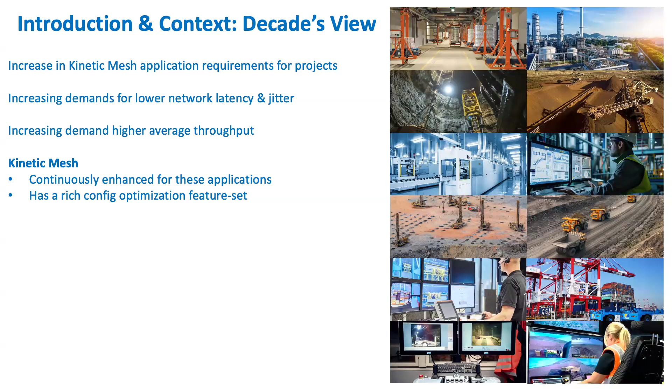Kinetic Mesh is continuously being enhanced for these applications. We continuously develop our rich config optimization feature set, and consistently develop new products and features to address these demands. However, one key takeaway today is for partners to understand their application's network performance requirements. This topic will come up repeatedly in today's session, and you'll see it covered in a lot of the training material as well.

It's not a good idea, and it's unfortunately very common today to see people approaching an opportunity or a new design or requirement and then simply selecting hardware when they don't really understand the application requirements. So we're focusing on some key network metrics and performance metrics you need to be aware of to understand the impact on product selection, network design, etc.

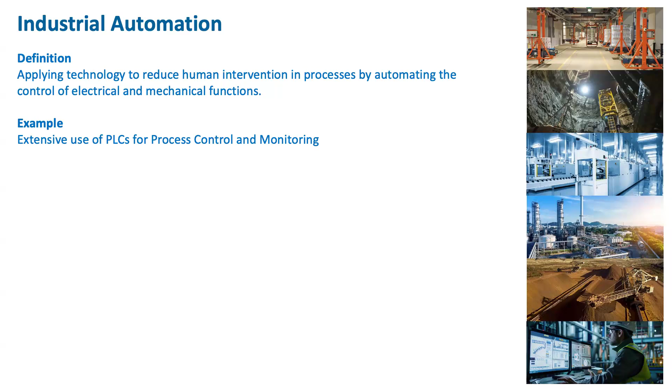This might be motor speed controllers, actuators, sensors of various types. There can be hundreds of different subsystems and devices that fall into these categories, and a PLC takes control of that. PLCs can be deployed in various logical layouts - master and slave configuration, or various formats - to monitor and control these subsystems, what we refer to as I/O, PLC I/O subsystems. So PLC control is a very good and solid example we want to focus on today in the process control and monitoring environment.

Modern PLC systems can use Ethernet networks to communicate, and this Ethernet communication often makes use of what we refer to as an Ethernet-based field bus protocol. Some of these PLCs have their own Ethernet-based field bus protocols used for communicating with these subsystems over an Ethernet-based industrial network. On screen, there are some examples of this.

Profinet, which is a standard handled by the Profibus and Profinet International Organization. EtherCAT, which is handled by the EtherCAT Technology Group. And then the Ethernet/IP field bus protocol, which is handled by the ODVA Association. To be clear on that last one, that Ethernet IP does not refer to the generic Ethernet 802.3 standard or the IP protocol stack - that specific reference is to a patented field bus protocol referred to as Ethernet/IP, as denoted on the screen there, and that protocol is managed by the ODVA organization.

Now, of these Ethernet-based field bus protocols, Profinet is an extremely common and popular choice. We see it a lot, so much so that we've actually created a guide which we'll go through today. This guide is applicable to some other process control and industrial automation environments as well, but it focuses on Profinet because it's extremely popular. Profinet is popular because it's very easy to configure for use over wireless mediums, which is not the case for EtherCAT or Ethernet IP, for example - there's less of a flexible feature set there. So Profinet is very commonly found in situations that require PLC or industrial automation control over a wireless medium.

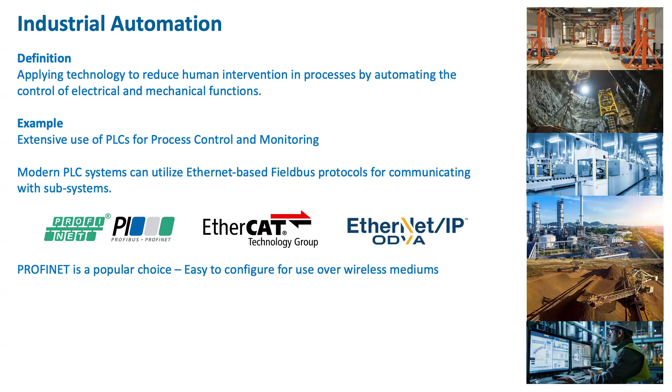So moving on, if we can quickly focus on the guide - a few important things I want to highlight. We're not going to go through all the details today, otherwise this webinar will simply take too long, but we will highlight some very important points contained in these user guides. The first thing is this user guide is available on the portals I mentioned earlier, and this specific guide starts with good context and background information on what Profinet is, where it came from, and what it's being used for today. So there's a lot of good information contained in that.

In addition, we highlight some key terminology in this guide, which is quite important if you correspond with PLC engineers. You might be a network engineer corresponding with a PLC engineer - you need to speak the same language. So we highlight specific terminology you should use that will be familiar to PLC engineers. It's a good way to educate yourself to be on the same page as they are, and it just makes the conversation you have with them more conducive. The guide also describes how to calculate Profinet networking requirements.

And it shows you, looking at these requirements, how to make some calculations and configure the protocol for usage over a wireless medium. There's various configuration options in the Profinet protocol that you can configure through the TIA portal software that allows you to optimize the protocol for use over a wireless medium.

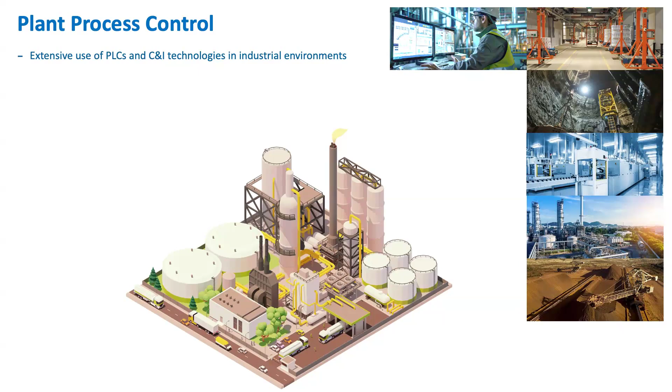And these modern PLC and C&I technologies use industrial Ethernet based on copper or fiber. So they have networks deployed in these environments, which is typically based on copper and fiber.

Now, cable failure is something that is not uncommon. We've seen it quite a bit, and it's actually one of the things that drives the kinetic mesh use case in these environments. We've had a number of successes in my region, in Europe and in Africa, where, for example, in smelter plants, cables or fiber would get damaged and processes would stop, or you'd have downtime because of cable damage. So this is not an uncommon issue.

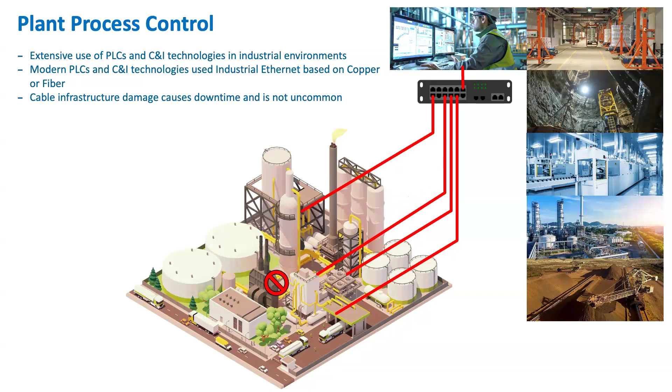And what we've seen partners do is by simply, very simply, just deploying breadcrumbs in parallel to this cabled infrastructure, literally just installing breadcrumbs at the endpoints and powering them on, you have a parallel mesh that's formed in parallel to this cabled infrastructure. And some of you might know, if you have breadcrumbs on the same cabled infrastructure, LAN infrastructure, you will get an APT group that gets formed. And the APT group is an instant automatic failover solution for this situation.

So you'll have breadcrumbs just simply installed in parallel. You plug them in parallel to this network, and if a cable goes down, the kinetic mesh will take over and reroute to the closest fiber point or wireless route back to the core where that information needs to go.

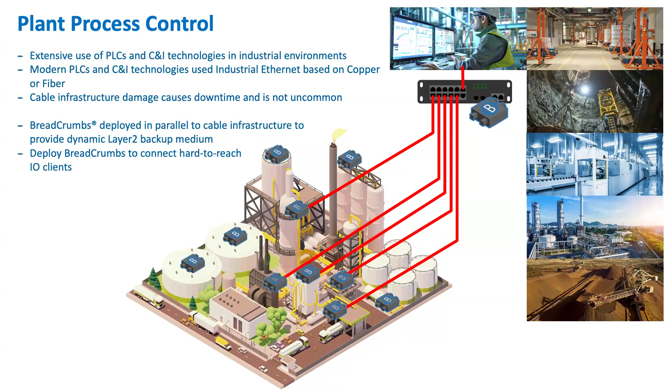Along the same theme, partners also install breadcrumbs in other areas of the same plant environment that's difficult to reach with fiber or copper. We've recently started seeing the conducive small form factor of the Cardinals. Partners have been deploying these in small DIN rail mountable enclosures, allowing control and instrumentation or PLC engineers to slot these Cardinals right next door to their PLCs on the same panel, put on a small magnetic antenna, power it on, and you have a very easy, cost-effective breadcrumb solution for the use case we just discussed.

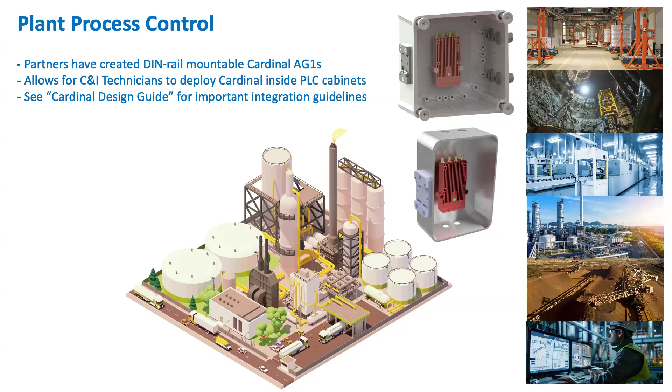For those of you who want to do something like this, please refer to the Cardinal Design Guide. It's already available on the portals we mentioned earlier, and there are some really important integration guidelines pertaining to powering, temperature monitoring, and other aspects to take into account when designing a solution around the Cardinal. It's a pretty good solution because of the small form factor and low power consumption.

Moving on, we have at least two partners on the call today that have seen success in this environment: electric conveyance systems, either electrified monorails or general electric conveyance systems. It's typically an overhead rail that provides a path and power to a carrier structure that carries pallets, vehicle bodies, or components in a production plant between different processes. These carriers are very often controlled by an onboard PLC system.

In the majority of cases, what we've seen is these conveyance system providers attempt to use Wi-Fi. There's a Wi-Fi client device installed on the carrier, used for PLC wireless control. A Profinet protocol needs to communicate with a master controller to control these carriers running on the conveyance system. A common issue we've seen is that Wi-Fi roaming often falls short when these devices need to roam in this difficult, metal-rich, highly reflective environment. We often find Wi-Fi roaming falls short, causing downtime.

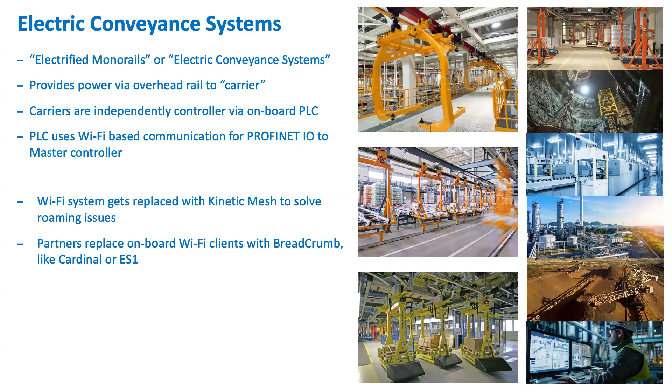These machines will stop because of timeouts due to roaming issues. What we've seen partners do is use something like the ES1 or Cardinals, install it on these devices, replace the existing Wi-Fi clients, and optimize the kinetic mesh for usage with a protocol like Profinet, negating that Wi-Fi roaming issue. It's a fairly solid use case that we've already seen good success with.

The last one I want to highlight is a very mature use case. We've had installations all the way back in 2016 that are still operational, referring to stackers and reclaimers. Stackers and reclaimers are almost indispensable at a large number of ironworks, power plants, ore or coal terminals, and various mines. Many of our multinational customers use the automated versions of these, and the majority actually use Profinet, a PLC system based on Profinet communication.

Because of the size of these machines and systems, they sometimes run over multiple hundreds of meters, a kilometer, kilometer and a half, sometimes two kilometer areas. That's extremely difficult to do with Wi-Fi. You have to install multiple Wi-Fis, or attempt to use some sort of fixed wireless broadband point-to-point or point-to-multipoint system. But the size of these machines, their mobility, and the turning action makes it a very good use case for kinetic mesh.

The distances typically aren't an issue for us, and optimizing the mesh for use with Profinet means this is a very solid use case. We've seen a number of successes still in operation after almost 10 years. So this is a very, very good use case.

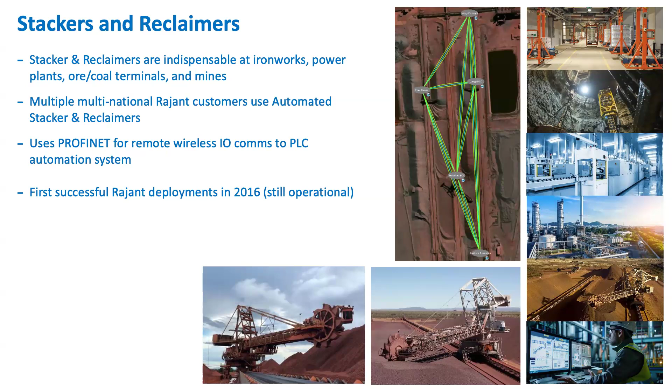So with all that being said, we showed you our guidelines, or the guide available for kinetic mesh optimization in support of PLCs and the Profinet protocol, and showed you some use cases to illustrate where this is actually used. That brings us to the first Q&A session.

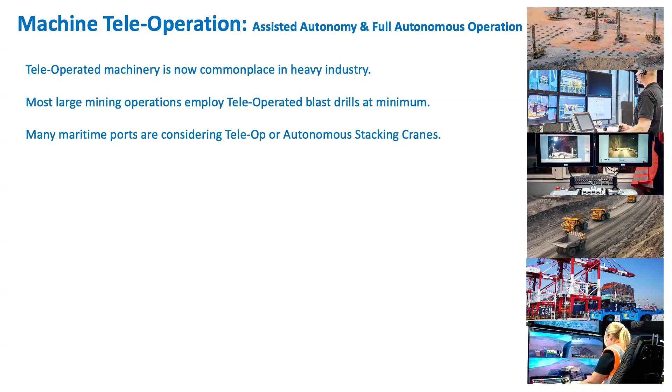Now, this application, as most of us know, because I've seen several of you on the webinar, are very familiar with the implementation of various iterations of both teleoperation and full autonomy or automated haulage. So it's very important that, number one, you're familiar with the Rajant Kinetic Mesh, but number two, it's very important that you're inherently familiar with the application you're attempting to implement. We're going to focus on those things during the second part of this webinar.

And most importantly, we're going to present an overview of the help guide that we've provided in deploying some of these applications.

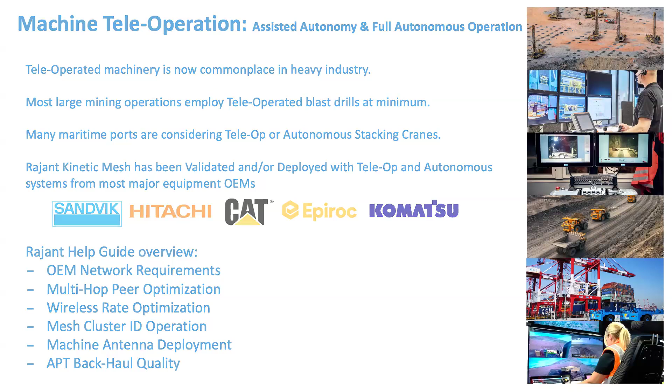So the guide is going to be available at both our partner portal and our support portal. The partner portal is channel.rajant.com, and our support portal is secure.rajant.com. Now, this guide does assume that the user has a very solid understanding of the fundamentals of deploying a Rajant Kinetic Mesh.

It also puts great emphasis on understanding the application requirements. This is extremely important because when you start talking to customers and end users, they're going to start throwing out figures like, we need a gig everywhere, we need 100% coverage, we need this, we need that. So it's really important to understand how to break that down, because maybe they need a gig, but maybe that's aggregate. With all of the applications coming together at the AP master, that's certainly something that's potentially possible and something we've seen.

That's why we had to develop a faster and quicker slipstream. But understanding how that breaks down to per machine, and how that's going to scale - understanding how this application scales - that's all going to translate to what your network requirements are going to end up being.

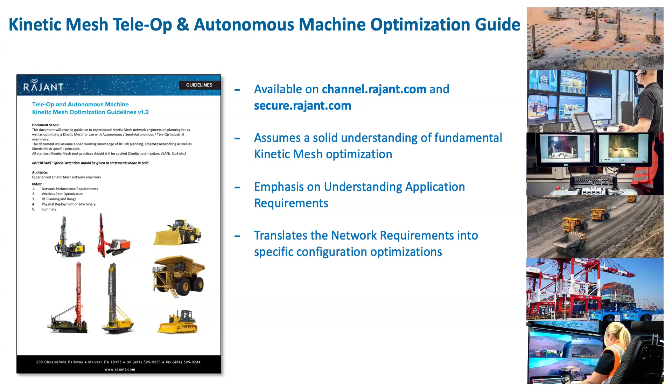So in the design process, if I could digress just a minute, especially in mines, they already have a Rajant network. So now we're talking about adding an application into an already existing network that's already been deployed and designed. You're going to have to look at this application and understand how that's going to change the network requirements for what you currently have. Does that mean adding more infrastructure, adding different models, things like that? These are all things you'll need to take into consideration when considering these applications.

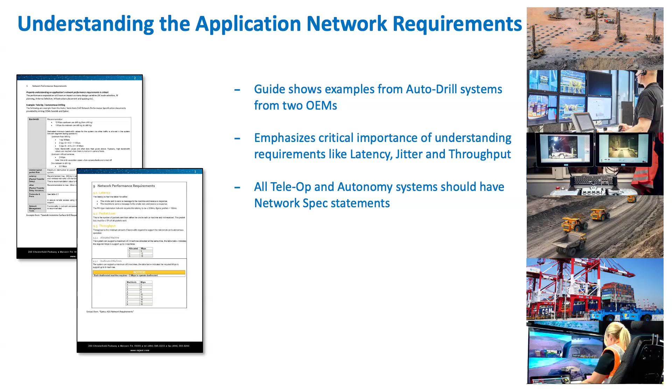So in the first section of the guide, we're going to provide these network requirements - we've actually provided two separate network application requirements from two separate OEMs. When you look at these, there's a specific emphasis on understanding the latency, the jitter requirements, and also what throughput looks like. All the teleop and autonomy systems are going to give you a specific network - there's a minimum network spec that they're going to demand these networks hit.

So for instance, this is the Caterpillar Command for Hauling, for AHS. As you can see here, they break it out in a very detailed fashion, so you can see what maximum latency should be, what your average latency should be, what your jitter should be. This is all very testable stuff. But here's the other thing: minimum throughput capability per machine - they even break it down for you per machine. So now you have to start doing math, right?

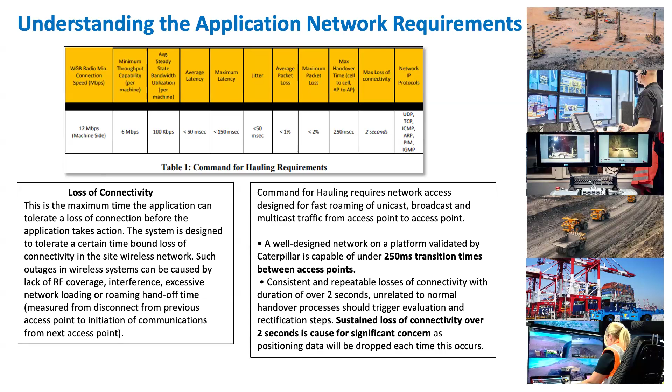Because if I've got a fleet of 150 haul trucks, 6 megabits per second for each of 150 haul trucks, and you've got to look at your other application requirements as well, because you're not always just running that one single application on that truck. So these are all things you need to consider when selecting your models and deciding how you're going to implement your network. Understanding the application is absolutely paramount in deploying these things. In this guide, we break down some of these requirements and how that could translate into your network design.

One of the things you should also consider when talking about deployment and implementation of the network, and understanding the network requirements, is how does that look on your kinetic mesh, with all of the different aspects of the kinetic mesh? Your RF environment is going to be extremely crucial. So understanding what that RF environment looks like, and then how does that translate to the throughput that you're going to need.

You need to understand what this is going to look like again for scalability. We want to make sure we're making mesh connections at a capacity that will provide enough throughput and bandwidth for some of these applications. For instance, some of these automated drill applications don't like slow speeds. So sometimes data delivery, just getting the packet there, is not always enough. Some of these automated drill applications require a minimum bandwidth or a minimum amount of throughput.

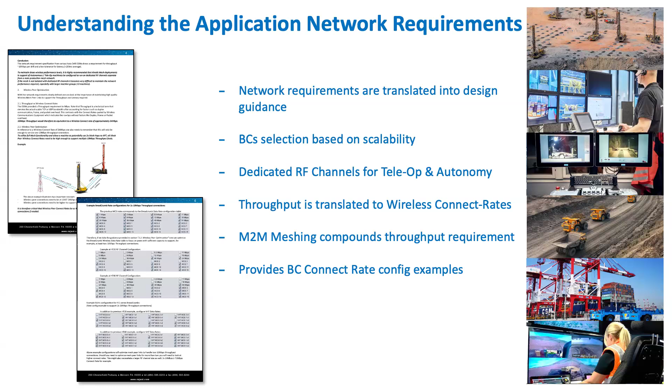Most importantly, you need to make sure you're looking at your dedicated RF channels, and you're only using dedicated RF channels for that teleop or for that AHS. So you might need to be deploying multiple meshes, or segregating your mesh depending on what the requirements are of these applications.

Now, one of the other ways you can get into segregating a bit is by using the mesh cluster ID. We've seen that in several instances. For instance, we had a customer running upwards of 20 remote machines on one network. With the way this was deployed, it was a very hazardous work environment, so everything operating in the area had to be tele-remote. They weren't allowed to have human beings in the work area. Everything had to be tele-remote.

So that made things interesting, because having that many in such a relatively close space meant there were some complications as far as jitter goes, and APT and things like that. So we had to get into setting up mesh cluster ID, so we could set up certain machines that could only mesh with certain infrastructure, without having to reconfigure the entire frequency plan for the entire operation. So mesh cluster IDs are a good way to segregate your mesh a little bit. But it's very, very important to understand, to do the link budgets, to understand what your RF environment's going to look like and what it needs to be, especially for throughput purposes. So that's going to boil down to, what does my SNR look like? How big is my RSSI, et cetera.

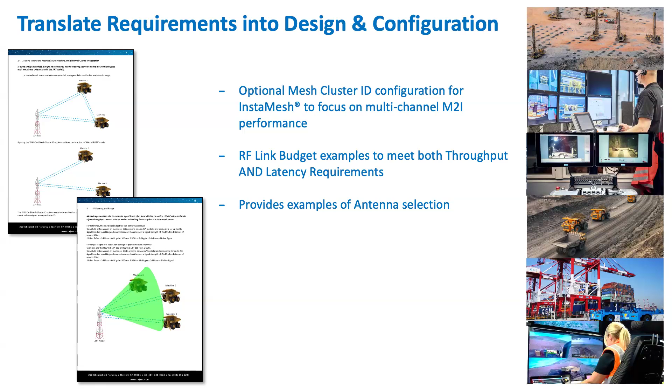Additionally, when you're deploying, you want to make sure your antenna placement on these machines and your antenna placement on your infrastructure is not hindering your efforts. We want to make sure that, because these machines are mobile, right? They're going to turn, they're going to do 360-degree turns, things like that. You have to be thinking about that when you're deploying your antennas. You can't be using panels on your mobile machines and expect them to connect 360 degrees. We want to make sure we're using good antenna placement with clear line of sight.

There are some application providers that actually demand or require hop counts. They want to make sure that you're at least—specifically, one provider requires 2 hops from the machine to wired infrastructure. So when you're deploying, you have to keep these things in mind.

You need to make sure that when you're designing your network, your APT network is suitable to meet the network requirements of these providers. It's also very important to make sure that your backhaul links, whatever form that takes, whether that's putting directional antennas on a Rajant node and using that as your point to point, or using a third party point to point.

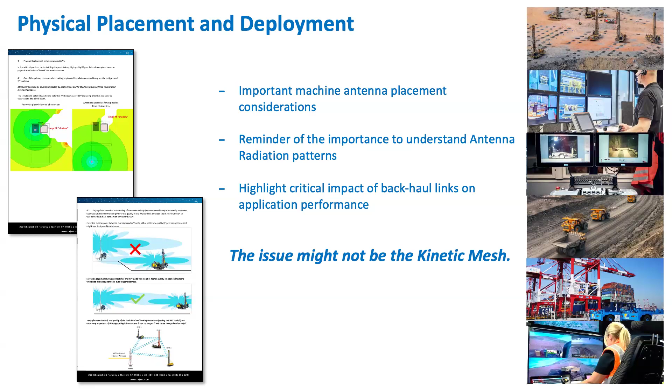But the basic understanding is understanding the requirement for your throughput, for your backhaul, and making sure that your point to point, point to multi-point, or if you're doing LTE, that backhaul link is suitable for meeting that throughput and bandwidth requirements.

So in the guidelines, we do provide a summary checklist or a priority checklist to make sure that as you're implementing, designing, and thinking about how you're going to deploy this, you go through this checklist and hit all of the points. You want to make sure that everything is coming into focus. There are things that are very easy to forget about, especially if you're running multiple applications.

You've got the AHS, you've got the Tele-Op, you've got your survey applications, your high precision grading applications, you've got tire monitor, tons of these applications all running at the same time. We want to make sure that everybody gets the data they need to run the business.

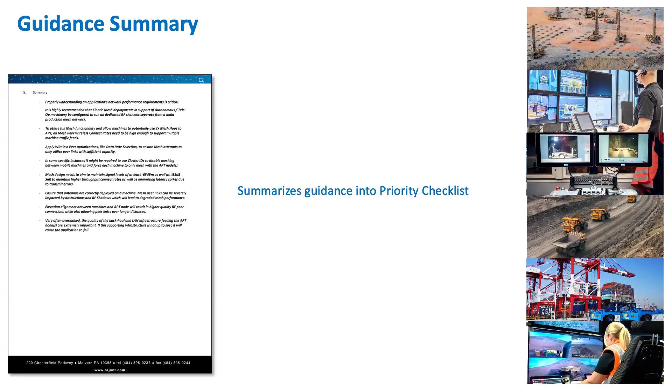So in conclusion, the beautiful thing about the Rajant Kinetic Mesh is it continuously optimizes itself. Now, there are things we can certainly do to optimize for certain applications, but by its very nature, the InstaMesh protocol optimizes routing to make sure that we're delivering data as fast as possible to its desired location.

Now, we are working very diligently on upcoming releases where we're going to have a set of preset configurations that will get you very close, depending on which application you're using, whether it's going to be AHS, Tele-Op, things like that. We're going to have presets so that if you're using this type of application, you can use this preset and it'll get you most of the way there.

Every network is different. Every mine is different. We understand that, and so do you. So we can get you most of the way there, but at the end of the day, you're always going to need to turn a few knobs to do something a little bit better. But again, understanding the application's network performance criteria is absolutely critical, and pairing that with the capabilities of your deployed Rajant Kinetic Mesh.